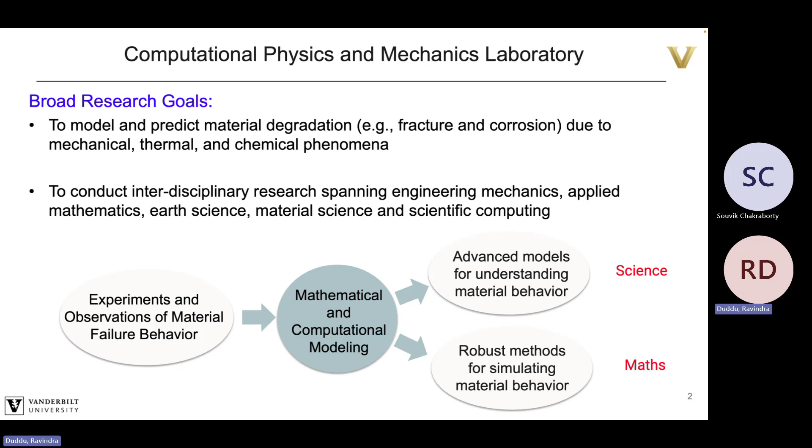So broadly, I established my goals as predicting material degradation, so fracture, corrosion, and those involve mechanical, thermal, chemical phenomena. It's interdisciplinary research, and I mainly focus on mathematical and computational modeling. Right? And you can set up advanced models to do science, or you could focus more on developing methods and get into the mathematics of how you do numerical methods and how you approximate functions and so forth.

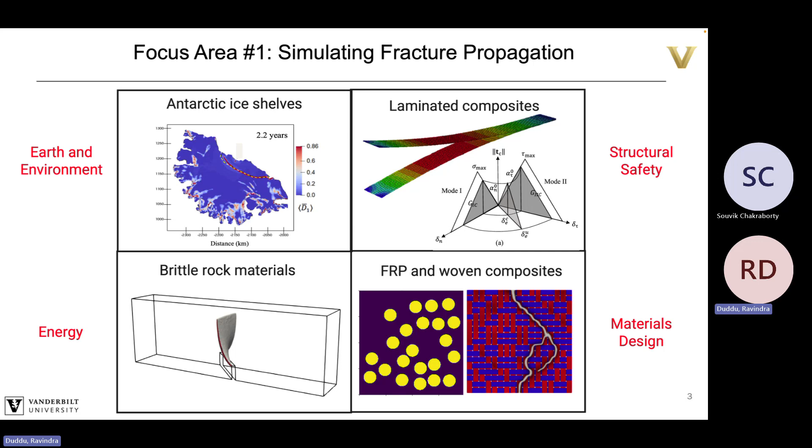And there are a lot of focus areas in terms of applications. As you know, in the US, it's all funding driven. So a lot of my funding came from NSF, that focused on Antarctic ice shelves, from ONR, that's related to laminated composites and woven composites. Recently, we've been working on rock materials, sort of in the geothermal energy space. So we are looking at fracture in that space. But overall, we focused on how to develop better models and methods to simulate fracture.

But to a lesser extent, we also looked at interface evolution. So corrosion, which is a type of material degradation, involves interfaces dissolving. When you have metals under high temperature, they form second phase precipitates. So that's a type of interface evolution. When you deform a hydrogel with extreme deformations, then you also need to track those deformations, and traditional Lagrangian methods don't do very well. So we formulated Eulerian methods, and then we have interface tracking there.

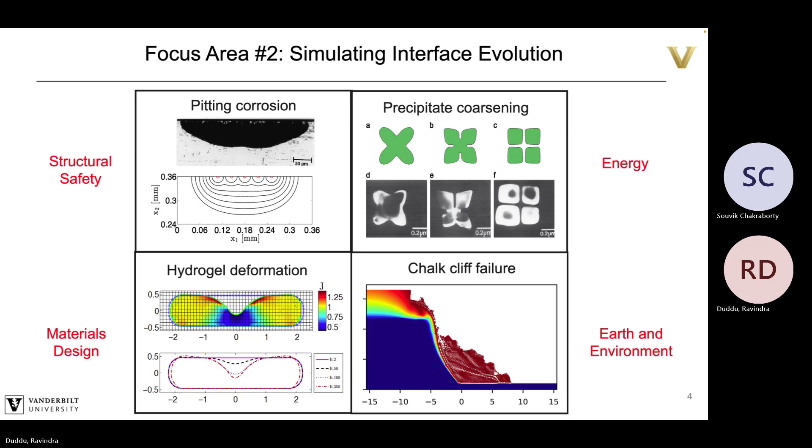And also recently we were looking at cliff failure, sort of when you have rock cliffs fail and then you have natural hazards. And we've been using MPM for that. So that's sort of my comfort zone. I wanted to define that before I move into the not so comfortable zone. And before I do that, I want to acknowledge my collaborators, Matt Berger and Soheil Kolouri, who are computer scientists, who kind of pushed me into this when we got group funding from 3M. And then we had some funding from NASA to also do machine learning.

So I'll come to the ice flow problems a little bit later. And of course, all the work that I'm presenting is from the PhD thesis of Yuxiang Gao, my brilliant PhD student who now is working for a dental company which makes implants, dental implants, and he's using machine learning to design patient-specific dental implants.

So the point I wanted to mention is that when you do mechanics and these data-driven new approaches, you can also apply them in industry as well. So academia is not the only path for PhD students in this regard. Okay, and Abhinav is a postdoc who helped with some of the phase field simulations in this.

So background, as I said, I focus on fracture, material modeling. So we always thought that characterization of heterogeneous materials is our goal. And you have carbon fiber composites, you have particle reinforced, you have poroelastic materials. And of course, 3D printing makes it easy for us to create these materials in the lab.

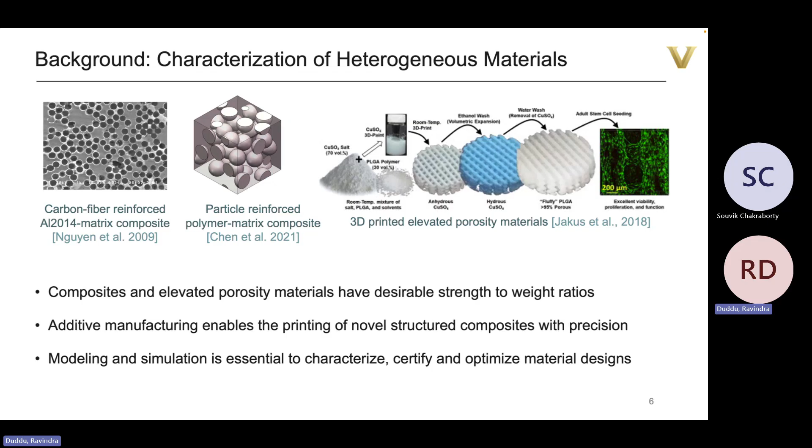And another aspect is experimental validation, and also to understand what can be seen in experiments and what do we want to predict, so that then we can actually compare it with experiments, correct? So for example, if let's say you train a machine learning model to predict stress, but if you can't really look at stress or measure stress directly, then you are again not in the position to validate them very well, right? So what can we see?

We can see deformation. We can use some sort of DIC measurement to get strains. You can also see fractures, right? So if you were to make a prediction on damage, you can actually look at these things in a microscope, and then you can say whether your prediction matches the observed morphology or not.

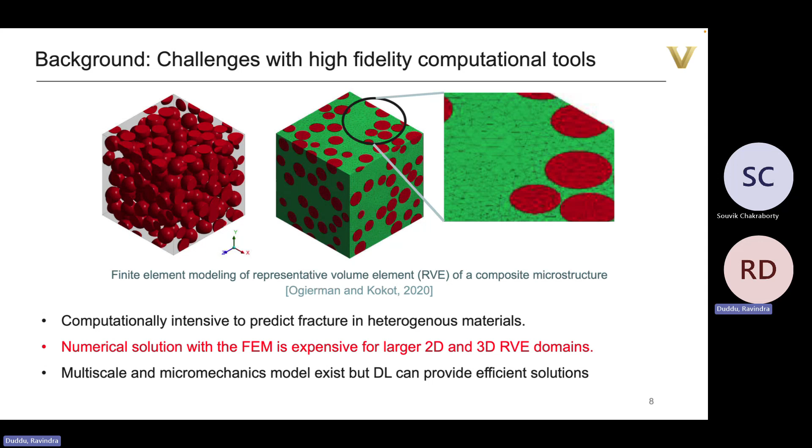But then, as I said, the challenge is that traditional methods like FEM, if you have to mesh it so finely with each particle in there, too expensive, and multi-scale and micromechanics exist, but deep learning may provide another solution. So that's sort of the background of how we got into this area. I'll probably generally skip this slide.

A lot of you are familiar with what data-driven approaches and physics approaches are. In a way, if you have less data and lots of physics, that's the space where PINNs exist. But if you have a lot of data and no physics understanding, then you use a purely data-driven surrogate. And then there are things in between. A lot of research has gone into this, including some of the works of Souvik that are widely cited in the literature.

And when we went through all this literature review and looked at all the various options that exist, we thought maybe you should start with CNNs, tested very well, simple to use, something like a U-Net model. You can pull it off the shelf, open source codes available. So let's start with something simple, you know that it's going to work. And then we can try the PINNs, we can try transformers.

And we tried transformers and we failed very badly. They were very expensive, didn't work the way they did for fiber composites. But here we are, right? So CNNs were sort of the easiest thing. You know, we can get things working very quickly. And so we started with that. And then I'll show a little bit on PINNs as I move forward.

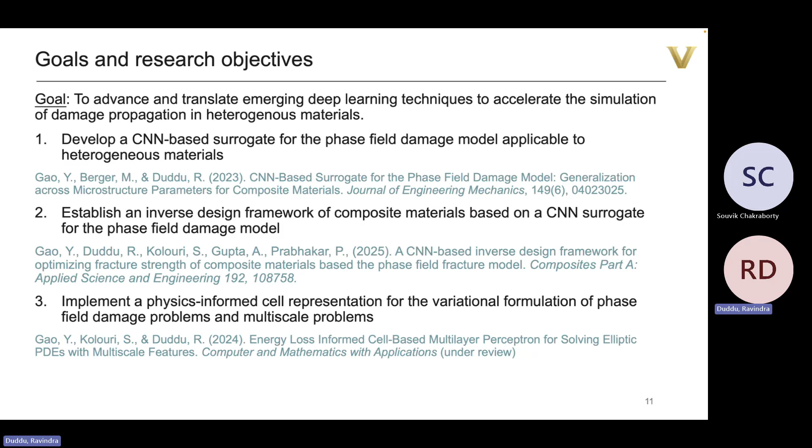And then I'll get to this physics-informed cell representation, which is almost close to publication. It's going through a minor second review. And there, the idea is, first, we started with damage and flow and diffusion type problems. But then as we were doing these benchmark problems, we realized that they can actually better represent multi-scale features. So I'll touch upon that, and then I'll conclude, and maybe we can have a discussion after that.

So objective one, we have these so-called phase field fracture models, phase field damage models. What is that? A phase field model is based on essentially two equations. One is your equilibrium equation that establishes the stress field in the material. Say you have some kind of a body with second phase fibers in there, like a composite with matrix and fiber domains, and you're applying some displacement or load, your constraints. As you're applying that load, it's going to fracture. Damage is going to nucleate at some stress concentrators, and then it's going to develop fracture.

The phase field model represents those fractures in a diffuse sense. Instead of saying it's a sharp crack, it's going to spread it out, smear it out. But the governing equations are based on the free energy. So you start with Griffith's energy formulation. You can write down the contribution from the bulk elastic energy. You can also write the energy from the interface when the fracture is forming, and then you do some manipulations and you get the equilibrium equation and the phase field damage equation. It looks like a diffusion equation with the Laplacian term and a production term or a reaction term.

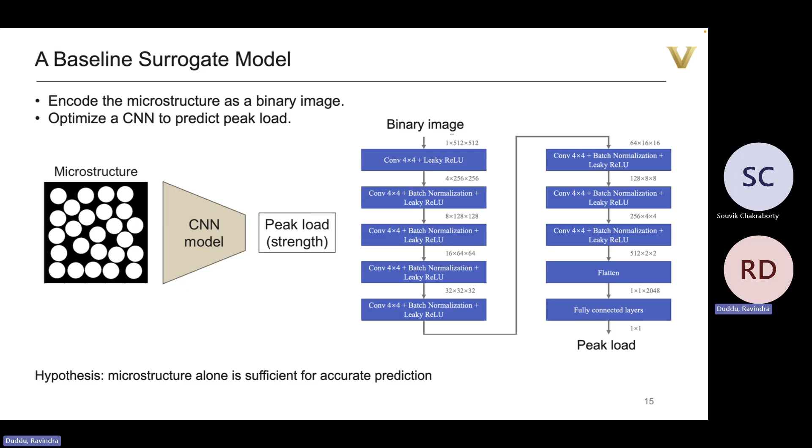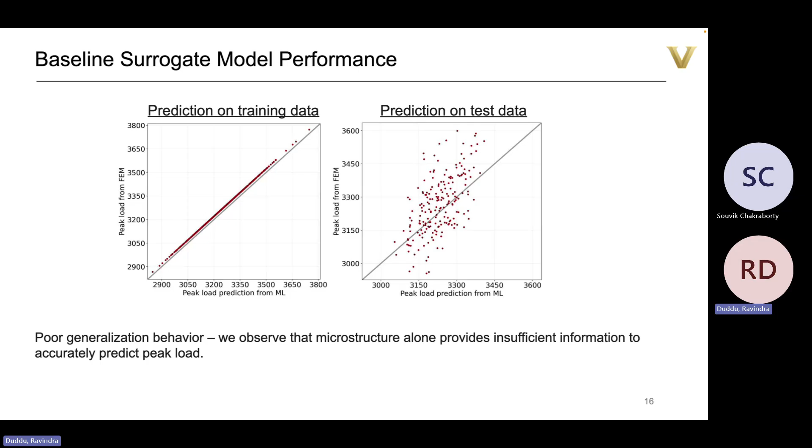So our hypothesis was that if we informed it, not just with the microstructure image, but with some other intermediate physics information, like damage or stress, it would do better. Okay, so let's test that. So what we said is, instead of passing the microstructure through that, let's do this, where we take the microstructure, we pass it through a U-Net. A U-Net, as you know, has this encoder, decoder type structure.

It's an image to image predictor. So we go from microstructure image to damage field image. And remember how in my phase field data, I record the peak load, I record the damage image, I take the FEM data and interpolate that onto a pixel grid, 512 by 512, and I generate these damage images. I use that for training and then testing as well.

Okay, so first you go from image to image, and then you use the damage image through that VGG16, and then you try to make the prediction for peak load. So instead of doing it in one step with the baseline, now you're doing a two-step. Okay, how does this do? But before that, maybe just a quick look at how the U-Net looks. Probably we'll skip this one unless someone is really interested in how we do the various blocks.

This is what we get. Okay, so we are only looking at this U-Net prediction capacity. So out of, let's say, the test set, which is 200 data points, we have some where it has a good match. We have some where the match is not so good. So if you take the lowest error case, you're getting around 9% error, right? But the RMSE, the total normalized error, is like 4%. But if you take the highest error cases for damage, in some points you get 30% error, right? So it's not the best in terms of getting full field image for these sorts of fracture type problems.

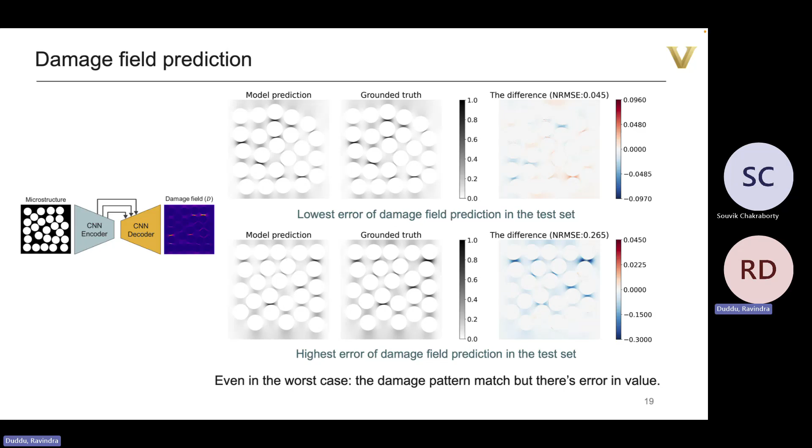So the point to take away from this is that even in the case where you have 30% errors and maybe the normalized root mean square error is like 26%, even then it's getting the locations right, the magnitudes are off. So it's very hard for a problem where you have a peak load that goes so high and then immediately drops. It's very hard for these methods to predict, is it 0.3 damage or 0.6 damage, because it's happening so fast. Within one step, it's damaging quite a bit, right? So it's not something that it can learn very easily from this vast number of microstructures, but still it gets the locations right.

But to summarize, this was our first curiosity question. Can we do better by informing the machine learning model with not just the microstructure information, but some other physics quantity, something like damage, and do a better job at predicting?

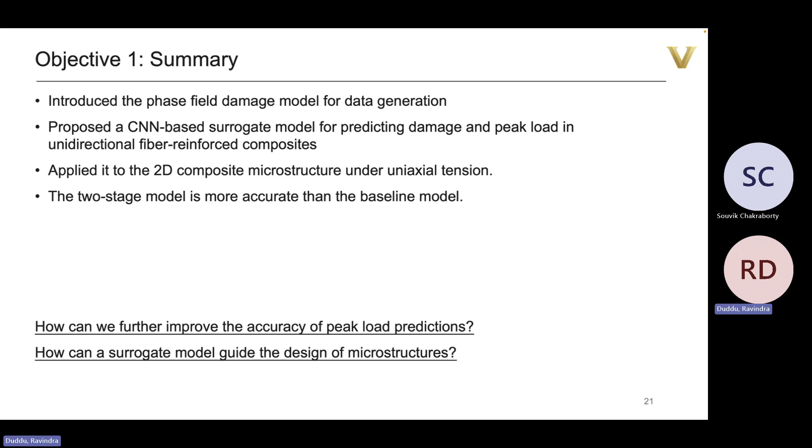So then we move to the more interesting part, I hope. The first thing we wanted to do is improve the accuracy, right? The easiest way to improve the accuracy of a data-driven model is to generate more data, or to do something smart with the data. So what we said is, there is a case to be made that there is a flip equivariance and flip invariance in these cases. That means if you take this microstructure and you flip it, the damage should also flip, technically, right? And so you can now take one microstructure, flip it, and then flip the image, and then you got another set of the data. And you can do that 2 more times, and then you get 4 times the data. And so that is the equivariance part.

But the peak load in all of these cases should be invariant, okay? Because you're averaging it over the entire width, right? So the peak load must be invariant, but the damage field or stress field should be equivariant. We could have done this much smarter and much more mathematically rigorous if we used some kind of block to enforce the invariance within that architecture itself, right? But we wanted to do something quick and easy, and so we took the easy route.

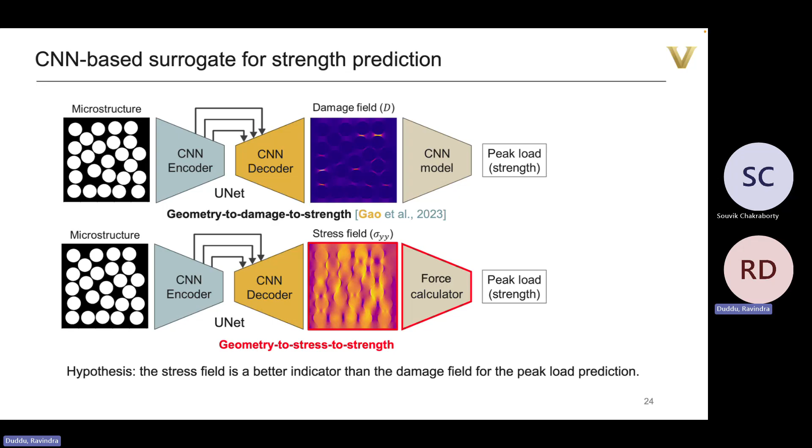So how do you do the force calculation? It's an image-to-image model. You give it the image of the microstructure, it predicts the image of the stress field, and then you go pixel by pixel and add all those pixel values, and then you average it. Or if it's force, you don't even have to average, you just add them up, right?

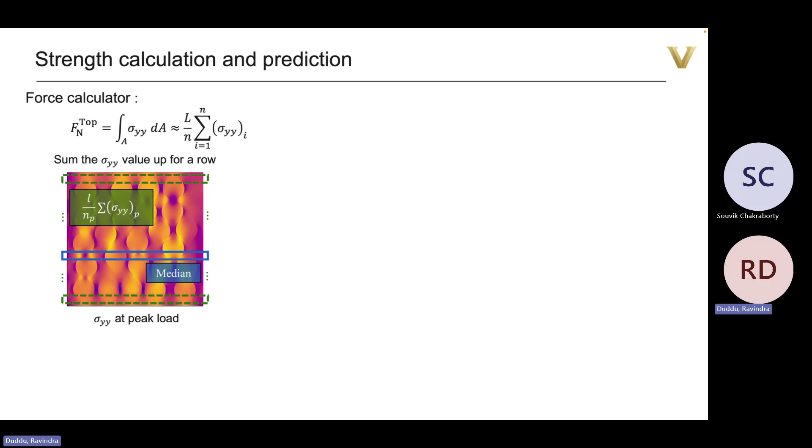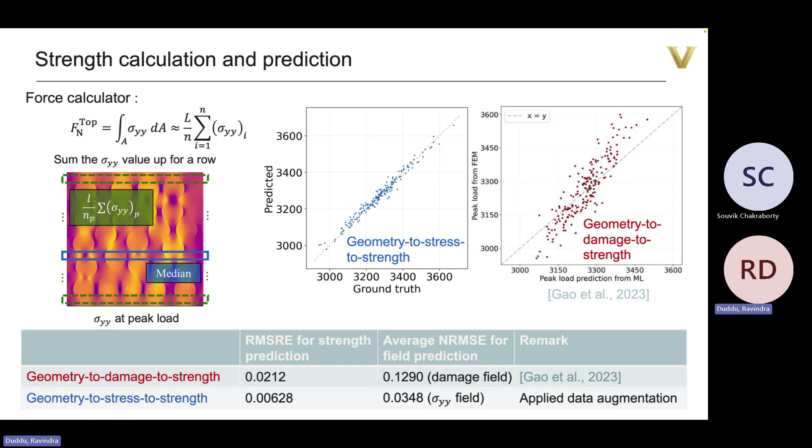So we were able to make the prediction accuracy go from 2% error for the strength, or the peak load, to 0.6% error, right? So very low error, so to speak. Okay, so I convinced you that informing with some physics and then making this prediction for peak load is better than just going baseline microstructure, complete black box. And now, does it actually work if it's an inverse design framework?

Okay, and so what I did was you have the design parameters, but in our case, the fiber diameter is fixed. The location is varying. The volume fraction is also fixed, right? So we are not considering all the design parameters. The only design parameter we're allowing to change is the location. That means move these fibers randomly. So the question we asked is: is there an optimal pattern of these fibers that gives the maximum peak load? Right? Very simple question, simple microstructure, toy problem.

And so what we need is an end-to-end forward model so that when we back propagate automatically with auto differentiation, we can do the inverse calculation. So given this fiber location, we should have an automatic way of generating the differentiable simulator. This essentially uses a sigmoid function to generate a level set type of figure, right? So we give a sigmoid function such that it is 1 if it's in the fiber and 0 if it's outside the fiber. And then you overlap all those sigmoid functions of every little fiber, put it together, and you get that total image. Okay, and so this is a differentiable simulator of the microstructure.

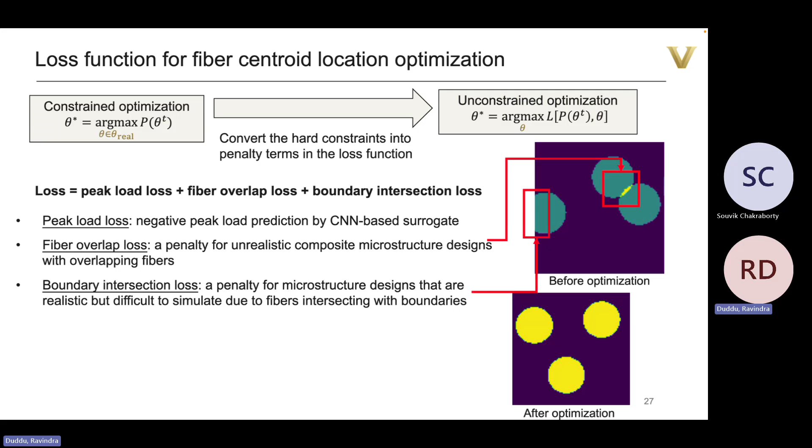We could have done that periodic type stuff where it leaves from one side but enters from the other side, but it was a lot more complicated to do that in FEniCS. And in fact, in original FEniCS, you can't even apply periodic boundary conditions. You have to go to FEniCSx perhaps. So we took the simple way out, just let the fibers not leave the domain.

And so this is a simulation for when I'm trying to optimize the peak load in the Y direction, right? And so I have the peak load in Y as my optimization objective. I have the fiber overlap loss and the boundary intersection loss to make sure the fibers don't leave. And as you can see, it starts from some low random initialization, which starts at like 3000 peak load.

And as the locations of these fibers are optimized, it goes to 4000, bounces around a little bit as it's trying to move things around, and then it converges to a type of shape, which you probably notice is called the hexagonal close packing, right? So you have one fiber surrounded by 6 fibers, like the hexagon.

And the interesting thing I would say is we didn't expect this, that the peak load that it was predicting with this optimized structure was 4000 when our training data set was only between 2900 and 3600. That means that it was going out of the training regime.

So sometimes people will say, oh, CNNs, machine learning, they're only interpolatory. They don't have the capability to extrapolate. But if they are somehow based on physics, I think that it's okay to say that in this case, they are learning something and not just being an interpolator, right?

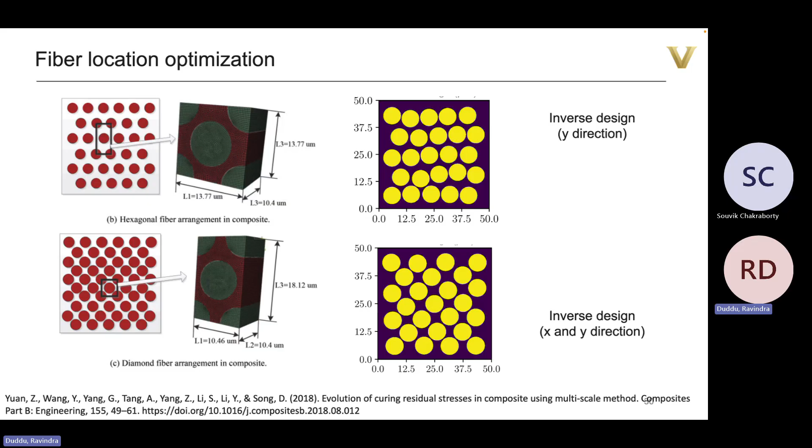But we thought through it and we said that maybe in the case when there is some sort of a notch or a fracture or something in the part, can we use the fiber arrangement so that you reduce the volume fraction of these fibers, but place them optimally in fewer numbers, but without drastic reduction in the fracture toughness.

So here I'm showing sort of that concept where, let's say you have a notch, you could put 50% fiber into that microstructure, right? And then you get a peak load of 520 units.

But if you use smartly lesser and lesser fibers, that means here I'm only using 25% and 12.5%, then I could place the fiber such that the fracture toughness of this microstructure, even with 1/4 of the fiber volume fraction in the original case, does not have that much reduction. So that's what I'm trying to say.

For the optimized microstructure, reducing the volume fraction to 1/4 only causes about 10% decrease in the strength. That means you dropped it by a lot, but you still retain a lot of the tensile strength. That's because, of course, if you take a very stiff fiber and place it at the fracture tip, that's going to arrest the crack and make the crack path tortuous, and it's going to increase your fracture toughness, correct? So it seems to capture that.

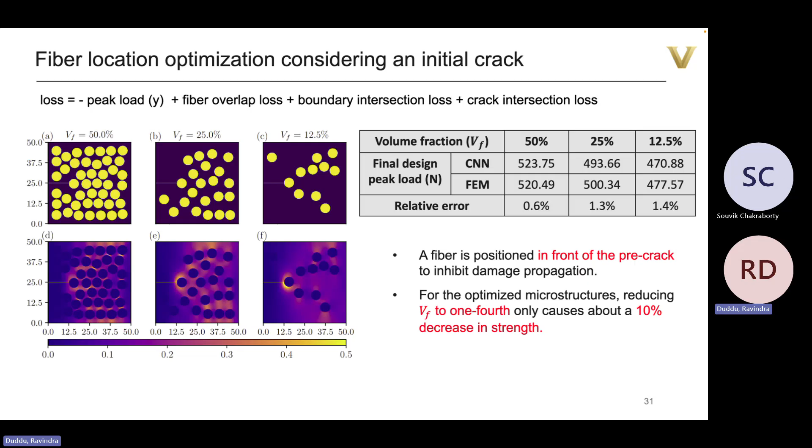It seems to show us that these kinds of optimal placements are viable for complex domains, complex geometries, and so forth. So that's where we could probably use it. To summarize, and I don't know if I'm running over time, I'll try to maybe speed up the next part.

So in this, I was able to show that, yes, we can actually make this inverse design and probably use it in cases where you need to reduce the use of fibers by reducing the volume fraction, but still keep retaining very high peak loads, right? Now, all this was CNNs.

We then asked the question, can we do all this with PINNs? Then we don't have to generate so much training data, and we can just use our phase field PDEs as our loss function. So that's the question. And when we tried that, we found that it was much, much more expensive than running a FEM simulation.

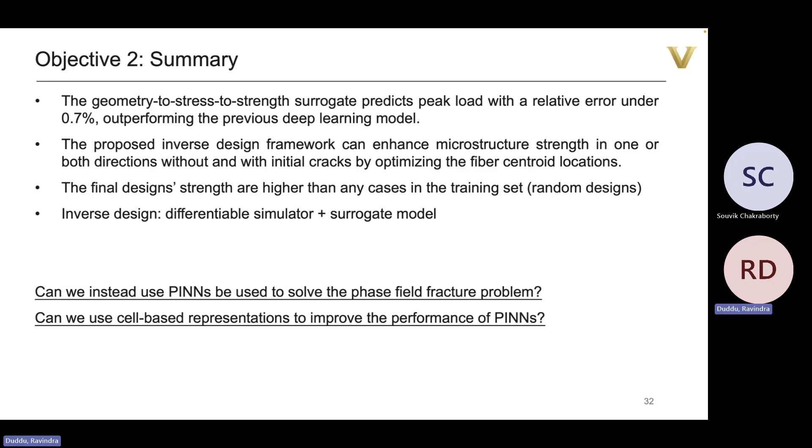And we went down this path with my collaborator, Matt Berger, to see if you can use a grid-based representation to make the performance of PINNs faster. So I'll quickly describe that in the next maybe 10 minutes. And a part of the motivation was also to use those kinds of grid-based methods to solve flow laws. So if you have the Antarctic ice sheet, you have to solve these Stokes-like PDEs. And so you can actually use a PINN to solve these, okay?

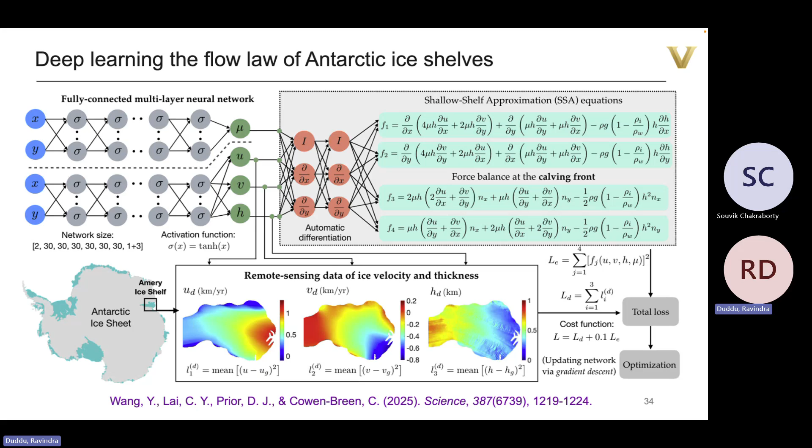We now have a foundation project from the Heising-Simons Foundation, where we are again looking at ice sheet models, where we go from velocity to stress, and then we add some pressure. And right now we are using a phase field fracture model to predict how cracks are growing in the ice. But our grant aims to replace that phase field with a neural network surrogate, right?

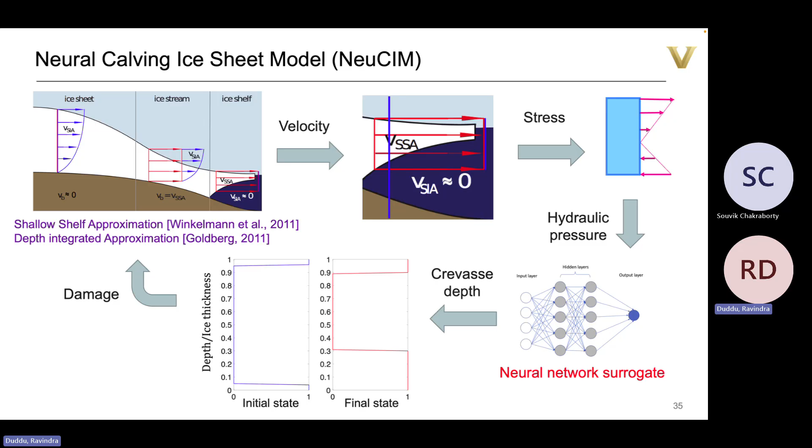And this is where I need the help of brilliant minds like Souvik and others, right? Because I can't do it myself. So what we want is we take this input, put it into a neural network that's well trained, and that gives us the crack depth.

But what we also wanted is a physics-informed neural net that would be much faster than the traditional PINN. So we looked into the literature, into this coordinate-based one. In these models, you have a domain, and you give input as x, then the neural network has some function that takes in x. It has some parameters of the model, and using that you can do auto differentiation, get the derivatives, and the derivatives go into the loss function, and then you optimize for the loss function. So probably all of you know that.

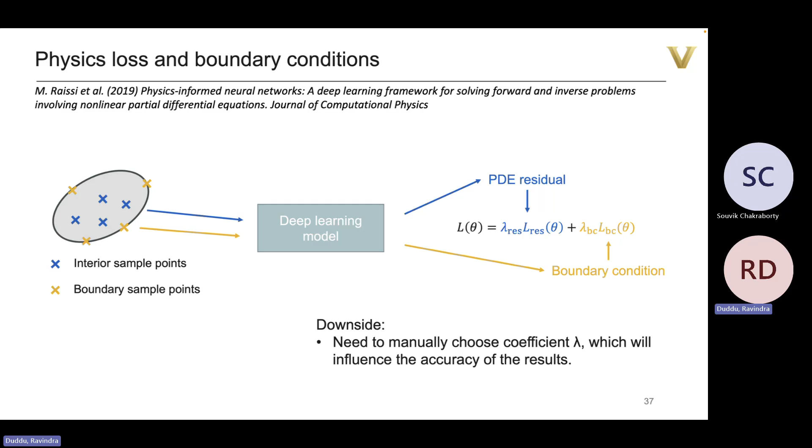But if you have to do the boundary aspects, because the PDE is only defined in the domain, outside on the interface you have boundary conditions, you do the same thing. You sample on the boundaries, that goes into a PDE loss function, and then you add the boundary loss with the interior loss, and you have to use some weighting factors to decide which ones you want to weight more and which less. So there are some downsides to doing that. That really degrades the optimization. So we learned and noticed all that.

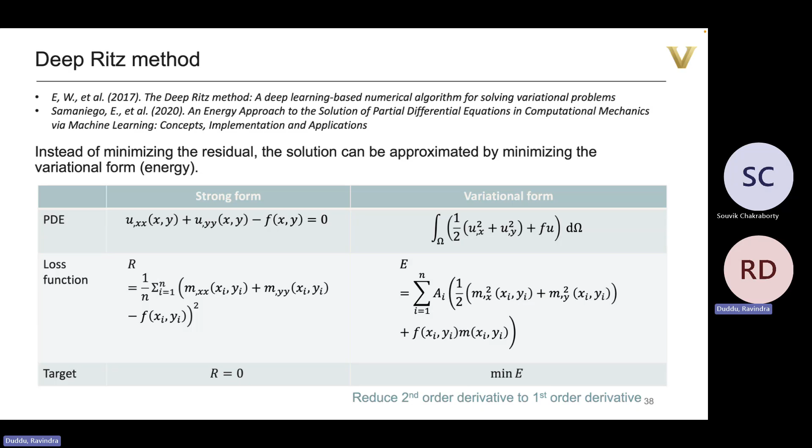And then we also looked at these strong forms which have second order derivatives. But if you actually consider variational forms, in fact, I think Souvik and Somdatta Goswami proposed this energy form loss, one of the first to do these sorts of things. And so we also liked that we don't want to use the second derivatives, we want to work with first derivatives with the variational form, bringing in some of the FEM aspects. So this is how the model works, right?

So we don't go from X with the MLPs directly. What we do is we have multiple grids, like a multi-grid method. And the idea comes from this paper by Müller et al., where they use this for graphics applications. They call it instant neural graphics primitives with multi-resolution hash encoding. So if you want a high resolution description of a figure, but with low memory requirements, then use these multi-grid cell-based representations. That was, I think, the idea.

So here, the big broad idea is that we take X on the grid, right? And at each of those grid points, you have grid parameters, which are like feature vectors, and you use those grid feature vectors to interpolate the feature vector at that point. You can use something like bilinear interpolation, finite differences, and then you push that into an MLP, and then you predict the field that you want to predict, right? So what are we doing? This is sort of like a two-stage approach.

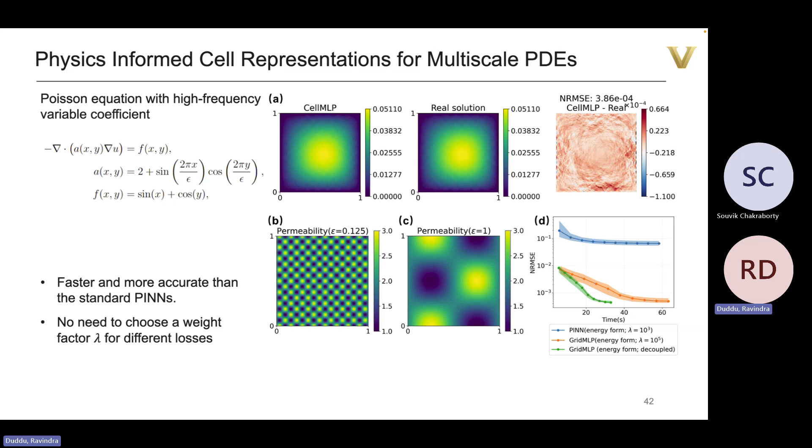In those cases, the PINN was struggling a lot. If you take the standard PINN, your errors are stuck at 10%, right? But for those kinds of problems with multi-scale features, you couple the ability of the grid to represent these smaller scale features well, and then you're optimizing over that, and you can see that we were getting to errors below 10 to the negative 3. And we were getting much wider loss landscapes than just an initial drop.

Same thing, we also tried this in heterogeneous media where it's not just the permeability, but also some other force functions that had high frequency features. And we also saw the same thing, that the standard PINNs were not doing so well. You get orders of magnitude reduction in error in the cell-based ones.

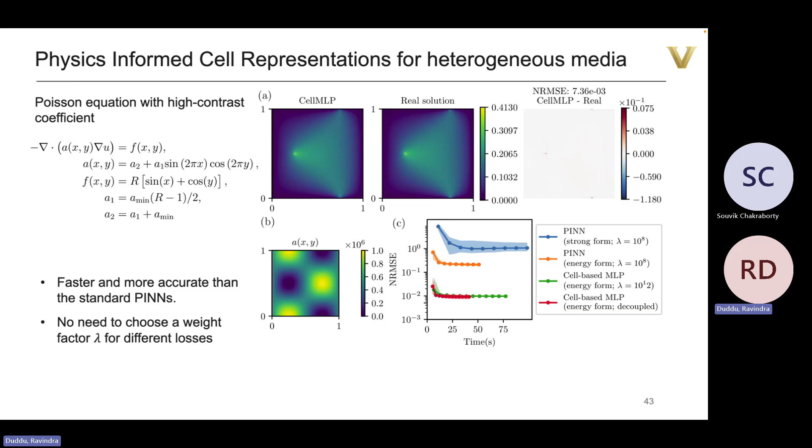But the downside of what we did was that we are restricted to rectangular grids. And as you know, most mechanics problems are not rectangles, right? You have complex geometries. Because we use the bilinear interpolation, finite differences approximation, we are restricted to these uniform rectangular grids. So that's a very strong limitation, maybe the Achilles heel of this method that we realized.

But that's where we stop. We have more examples in the paper that will soon be published, hopefully in the next month or so. I'll share it with Souvik if anyone's interested.

I'll conclude by saying a few things. In the first part, the UNet works better than the VGG16 type model. Data augmentation was useful. Stress-based force calculation improved accuracy. Then we could use that in inverse designs. We showed some simple hexagonal diamond arrangements that come out of this optimization. And then finally, we had this bilinear interpolation grid-based

multi-layer perceptron MLP. When you use those cell-based MLPs, they were not very good for phase field type problems, but they seem to be better for these multi-scale elliptic PDEs. So sometimes you start with something and end up with something you didn't expect. That's how research works.

In future, we want to overcome the limitation. That means instead of the rectangular grids, what if we had a finite element grid and used finite element interpolation, not finite difference interpolation, and then used the same MLP-based prediction? We looked into the literature, and one of my friends, Kai-Chi He, has already proposed that.

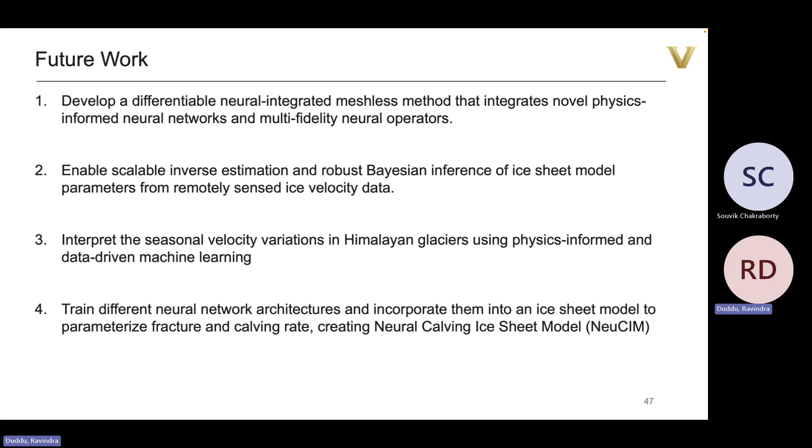How is bilinear interpolation helping? Yeah, so in the way that we are implementing, think of an MLP like this, right? So you're applying it on the whole domain, and I'm probably giving a very layman kind of explanation. Souvik, maybe you can help me with more mathematical details here. But let's say you have a very complex, high frequency type solution that you have to represent. An MLP would need to represent all those things with just the parameters of the model. So that means you probably need a very deep network, maybe a very wide network, and so forth, right?

Whereas if you use the grid, some of the parameters of the MLP are now replaced by the grid parameters. So you're now defining the model parameters at the grids as grid-based unknowns, like in FEM, right? Like your unknowns of the displacement in FEM are defined at the nodes of the finite element mesh. In the same way, your feature vectors, which are those parameters, are defined on these grids. And that means we don't need a very deep network. In fact, we are using one hidden layer, a very shallow network.

And bilinear interpolation is very fast, and we used CUDA subroutines to do that, the tiny-cuda-nn library. So it was doing it much faster than your Python PyTorch modules, so we got acceleration from that as well. And the majority of the acceleration came from the fact that we were using a very shallow MLP, right? So instead of using a large number of parameters to describe the entire landscape, you break it down, and your MLP is only trying to represent smaller regions where the nonlinearity is not so high. So then you don't need a very large or deep network. And all that put together makes it computationally very good.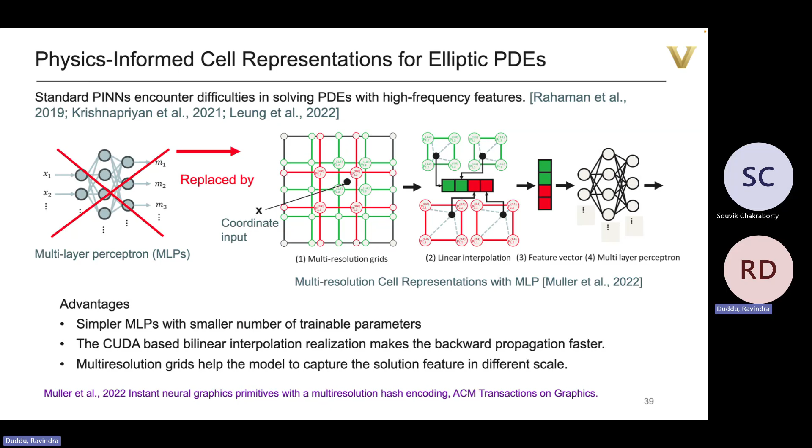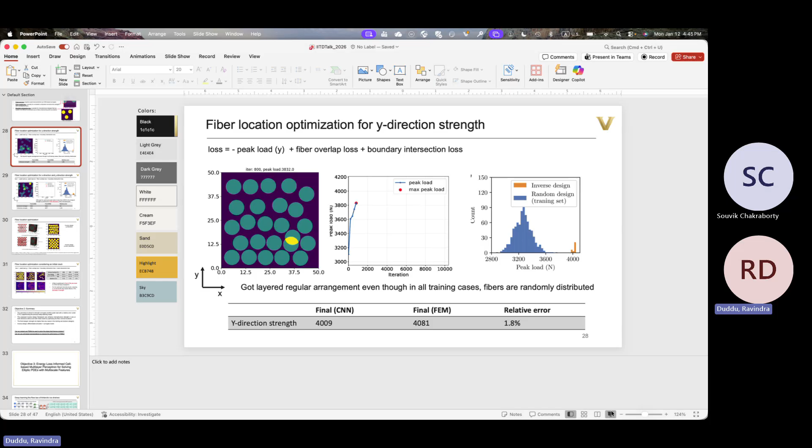And that's why in some of these simulations it's getting optimized very fast. These ones that I showed, right? These were very fast simulations. You couldn't have done this type of optimization with FEM, where you perturb it and run a full FEM model, then you have to take the gradient. It's not possible for predicting the peak load and then optimizing it with FEM.

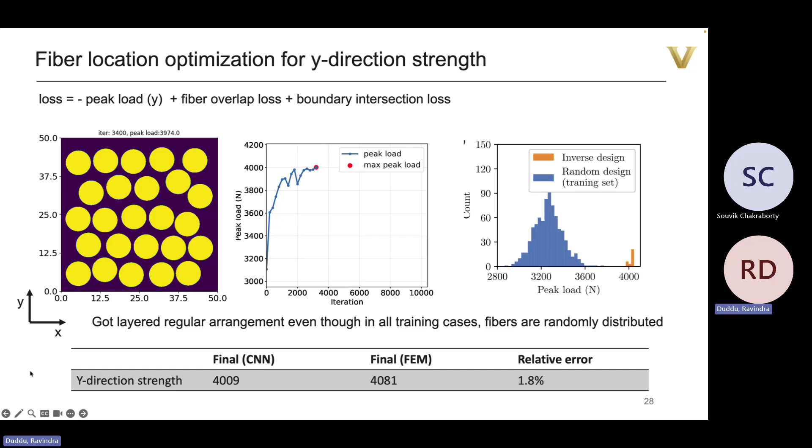Whereas first you train the CNN surrogate with the FEM simulation based microstructure. So first we do an offline training, right? So you have the CNN, where you give it the image, you make sure that it's predicting the correct peak load. Once you have it, then in this, where did that go? Yeah, this one. So in this one, there is no FEM now.

Once you generate the image, you just pass it through the CNN inference, and then you get the peak strength very fast, orders of magnitude faster. And that's the benefit of a data-driven model, that at inference time the cost is negligible. And that's why we could do these simulations very fast and get these kinds of optimizations.